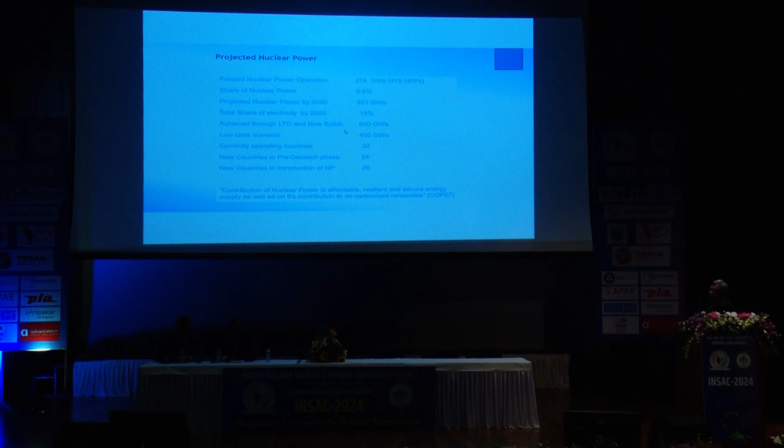In a low-case scenario it will be around 400 gigawatts. Presently we have around 32 countries operating nuclear power, and new countries in the pre-decision phase, around 24 more, and 26 more countries will be introducing nuclear power.

This was the statement at COP27, that nuclear power is affordable, resilient, and secure.

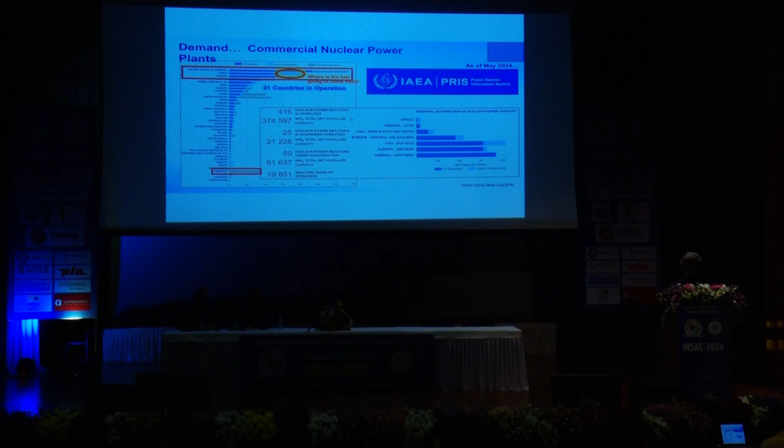This is the power reactor information system of IAEA, which is very dynamic on the operating reactors or shutdown reactors, and this is the statistics as of May. Anybody can access this daily, and you can see the major 3 countries, USA, China, and France, are building up a lot of reactors.

India also falls under building up new reactors, as you can see. But mostly the new construction is coming up in Asia, Far East, that is India and China, as you can see from this right graph.

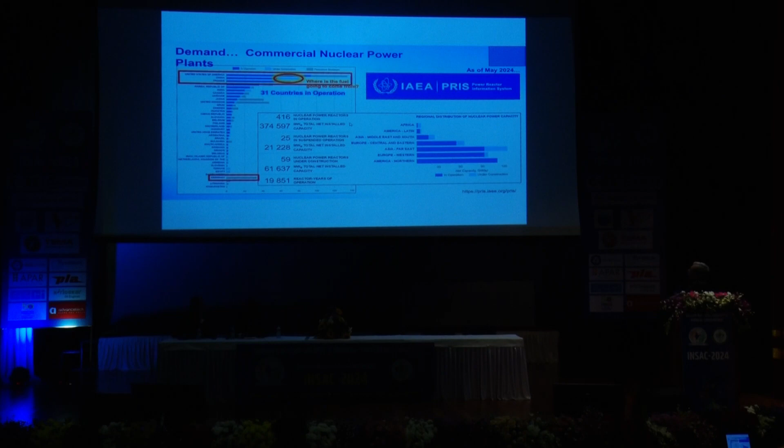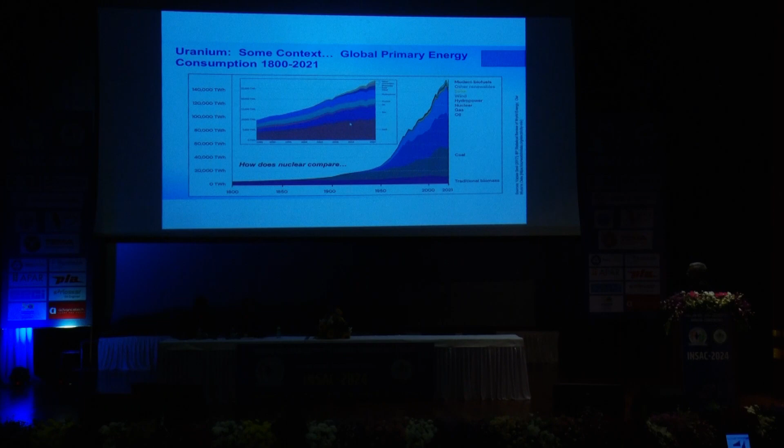This is another shot about the uranium spot price. There is a global supply that could reach around 145 million pounds by the end of this year.

As of today the annual demand is 180 million, and it's expected to double by 2040. So there will be a lot of supply gap in uranium by 2030.

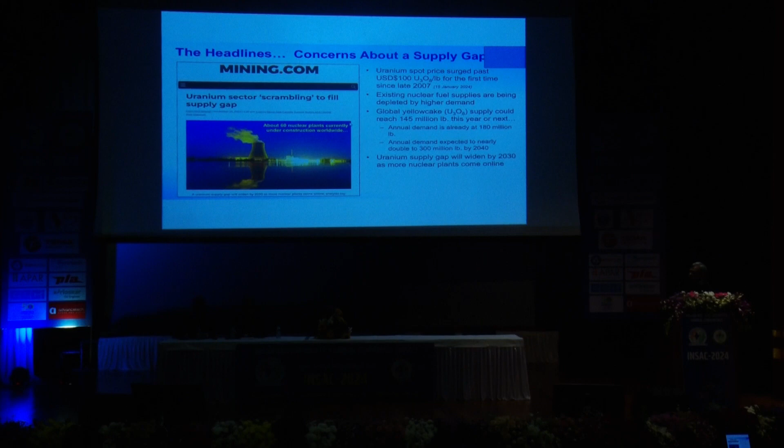This is another projection on the supply gap and demand. In the high demand scenario you may require around 90,000 tons of uranium, and as of today it is something around 35,000. So a lot of capacities have to be built up, and may have to be filled by secondary uranium supplies.

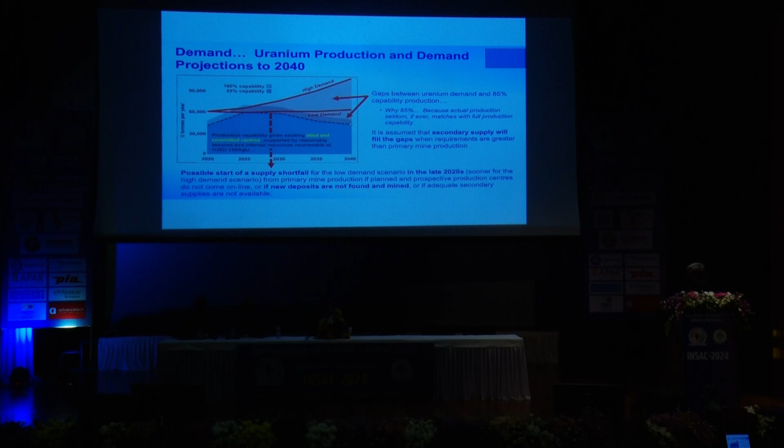A lot of thinking is going on about how to address this, that's why people are moving towards another source like thorium. So molten salt reactors may fill up some of these demands. If you take the scenario of SMR additions from 2030 onward, in the upper scenario of the study, you will have an additional demand of uranium of 26,000 tons.

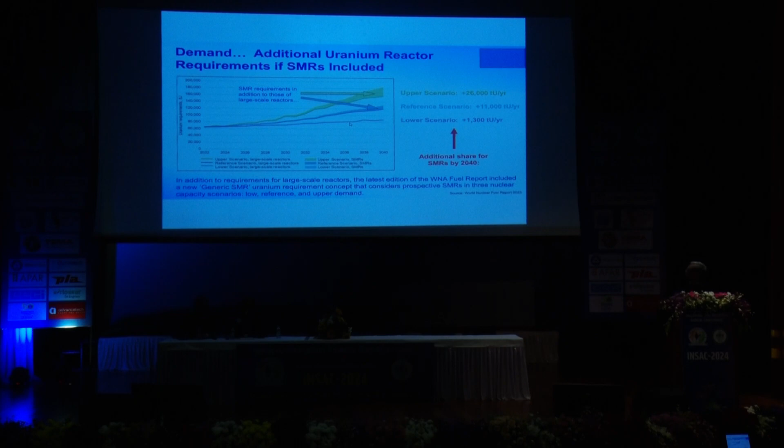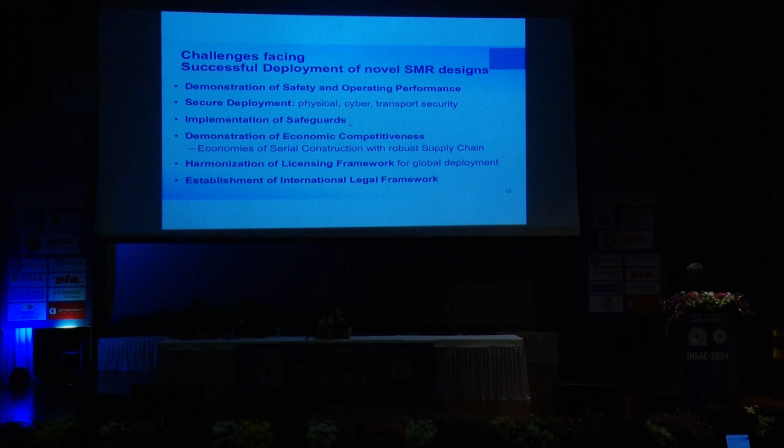That is where IAEA comes into picture, along with the economic competitiveness of these new reactors, harmonization of licensing framework for deploying them globally, and establishment of legal framework. A lot of work is going on in this last area, nuclear law related things, at international organizations.

Now coming to the fuel cycle. This center circle is a closed fuel cycle, right from mining to disposal. You can see the red flags are those which will need a lot of technical upgradation; a lot of challenges are there. The green flagged ones need to be adjusted a little bit, like in uranium resource or fuel fabrication, where little adjustment is required.

But in case of transport packages, we need to have a relook into the requirement of high burnup fuel and high enriched fuel, spent fuel. On reprocessing and disposal, a lot of things are to be closed. Still, a lot of work is to be done.

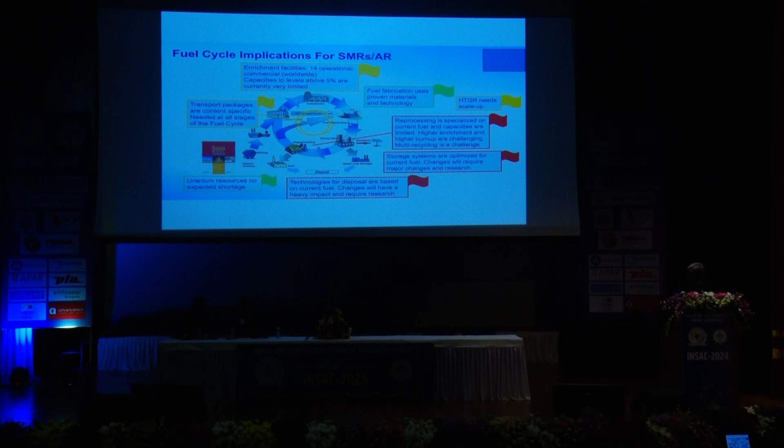So these are some of the SMRs being developed, like in Russia, these are already functional. There is thinking going on that these marine-based reactors can convert into land-based reactors. At IAEA also, a task force has been made to see the applicability of standards for these type of NPPs.

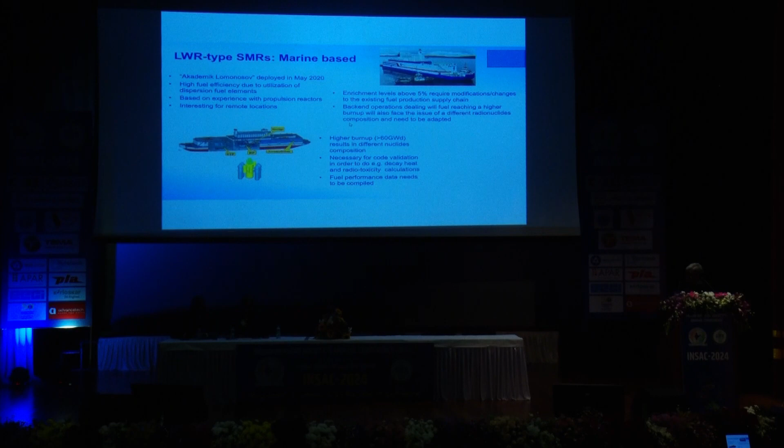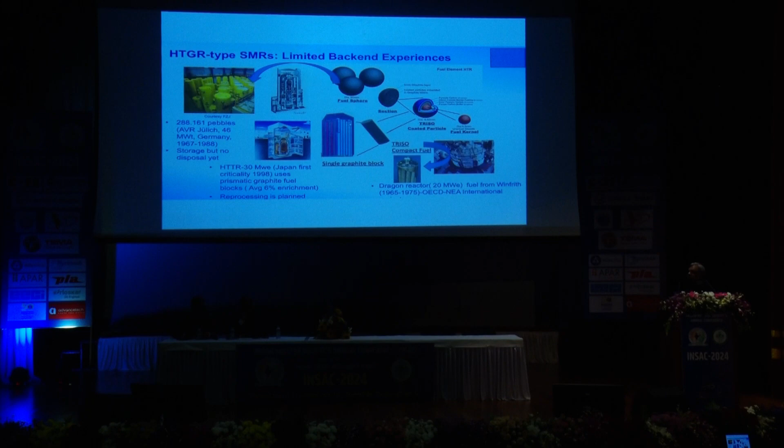Then high temperature gas reactors, like China's, will be the first one. But the earlier German reactor, the Jülich reactor, there is a lot of experience on its operation and the management of spent fuel. This is the fuel, called triso-coated particle fuel. The handling of this fuel is another issue, whether it is reprocessable and how to store this spent fuel. So, though it is advantageous in operation of NPPs at high temperatures.

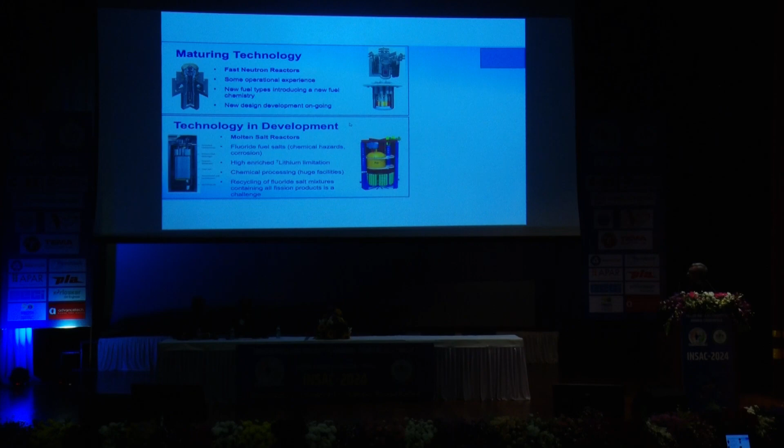So these are some of the maturing technologies which India already has maturity in, sodium cooled fast reactors. A lot of countries are developing this fast reactor without using plutonium, and the molten salt reactor is still in a very nascent stage. A lot of research is going on, and different salts are being tried, fluoride or chloride salts. The problem is about enrichment of lithium and then recycling of those salts. There is a tech doc published by IAEA last year on molten salt reactors, on the status and trends in molten salt reactor technology.

Then coming to fuel designs. There are 4 verticals in SMR. One is the light water type reactor, similar to what we have in PWRs. The second one is high temperature gas reactors. The third one is fast reactors, whether sodium cooled or lead bismuth cooled. The fourth category is the molten salt reactor, where the fuel may be thorium or enriched uranium mixed with the salt.

So here I would say that the molten salt is a long-term solution that is around beyond 2040. But yes, high temperature gas reactor, China has already commissioned one of that, and the experience from China will definitely be going a long way.

And on the fast reactors, advanced technologies are already in operation in Russia, India, and Russia is coming out with a 1200 megawatt sodium cooled fast reactor, and they are using 100% MOX fuel.

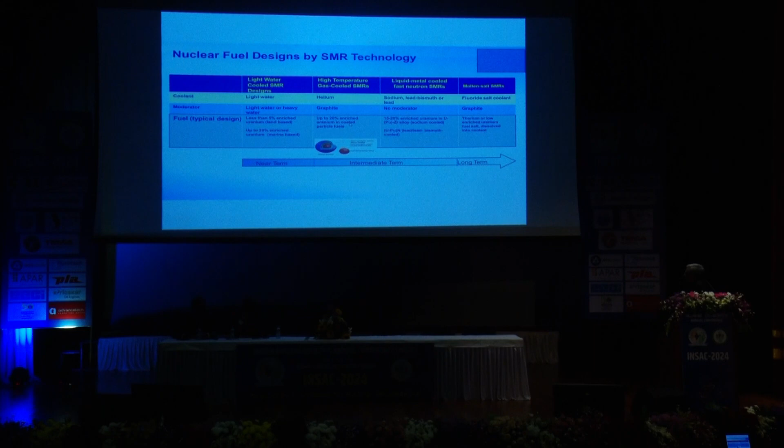So these are some of the challenges going to be faced, like for LWR, HALEU type of fuel, beyond 5% enrichment, fabrication and its packaging, transport. These are the challenges to be solved, and a lot of discussions are going on this HALEU, how to convert the present manufacturing facilities into HALEU type facilities, and how to organize the transportation of spent fuel with high burn-up and high enrichment.

And on high temperature gas reactor, a lot of validation of codes, irradiation tests, these things to be done, and advanced manufacturing techniques are being researched using additive manufacturing, and disposal is another challenge.

Then coming to fast reactor type of SMRs. So again, mass manufacturing of HALEU fuel or nitride type of fuel, and fuel performance at high burn-up, and pellet cladding interactions for metal fuel. All these are the issues to be resolved. And another is industrialization of this pyroprocessing.

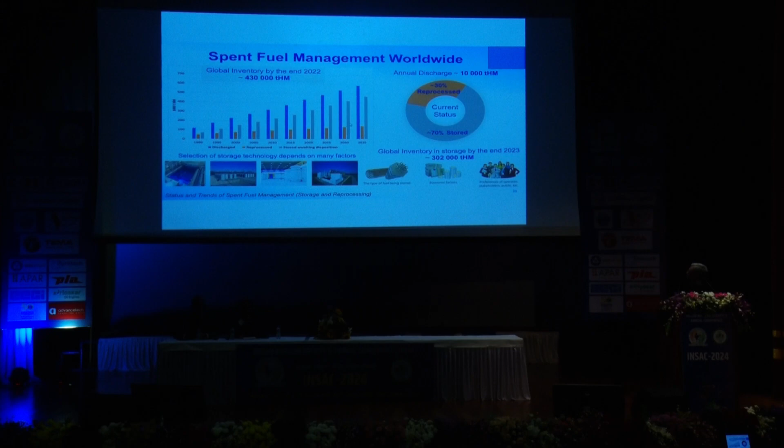And then Finland and Sweden, they may be the first to come out with the repository. Finland is likely to come out by next year for directly disposing the spent fuel. So a lot of research and a lot of discussions are going on this behavior of spent fuel in storage. And even IAEA is coming out with the safety requirement or safeguard requirement in long-term storage. So by the end of 2023, we will have a global inventory of 300,000 tons of heavy metal.

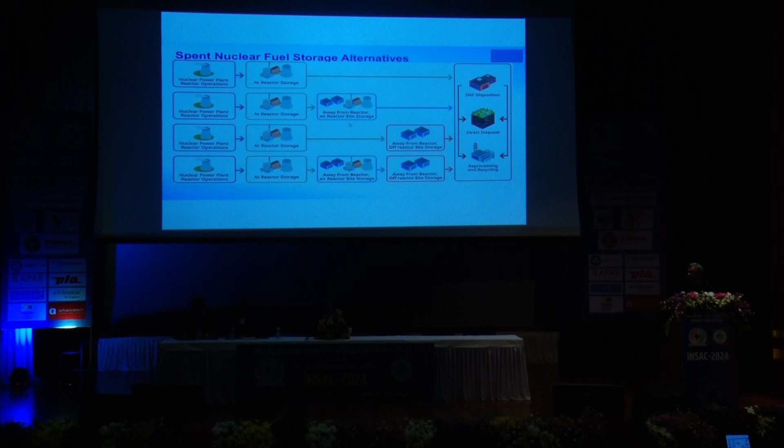And these are the different options for spent fuel management, maybe direct disposal or through reprocessing. So these are various options various countries can opt for. And these are different ways of storage, from pool to dry storage, from metal cask to concrete cask.

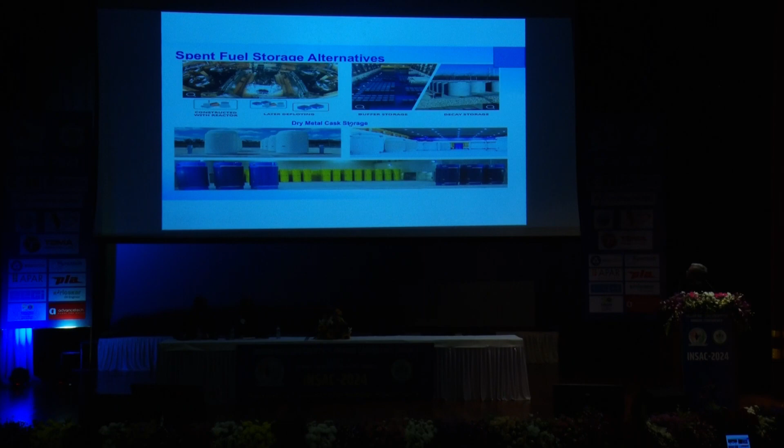And so now coming to next stage of advanced fuel cycles. Here again the major countries like France, Russia and all, those who are into reprocessing, there are a lot of discussions going on. I was fortunate to be part of that OECD NEA technical working group, and they are thinking of what India has already done about partitioning, transmutation and all that. So modifying their flow sheets to remove the radionuclides and to reduce the waste.

So these are different options, open fuel cycle or once through, or multi-recycling in fast reactor or through LWR route. And some of them are also thinking through ADS route. But a lot of research, like how much waste will be generated from each route, has been done, and this report is likely to be published by next year. I was part of that report. So they are doing a study on which of these routes will benefit in reduction of the minor actinides in the waste.

So, but these, the drivers will be uranium price. Suppose the uranium price goes very high, then this is the route to get back the uranium, and competitiveness of this fast reactor with LWRs. So these are the things; even now costing and economics are playing a big role at international organization, finding out the costing of these fuel cycles.

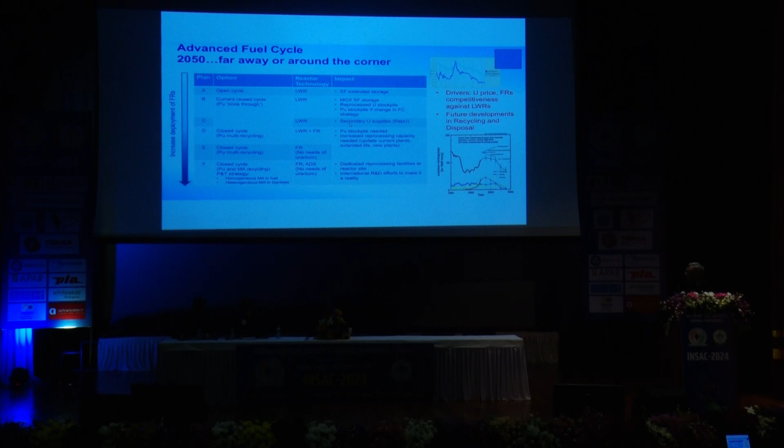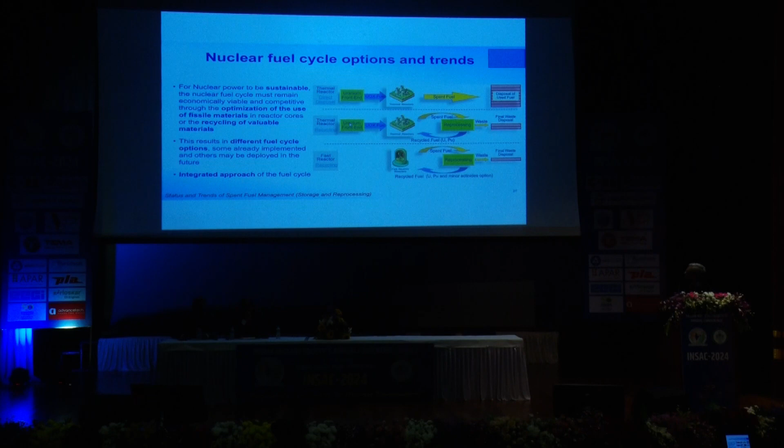So these are, in a pictorial form, the different options and the trends going on in the fuel cycle. And this is one of the reports which is under publishing. And you can see in the center the BARC's technology of cesium-137, ruthenium, and I was at the helm of affairs when we developed this ruthenium-106 in BARC. So this has been very much appreciated at international level, and Russia has been in an advanced stage of removal of these radionuclides.

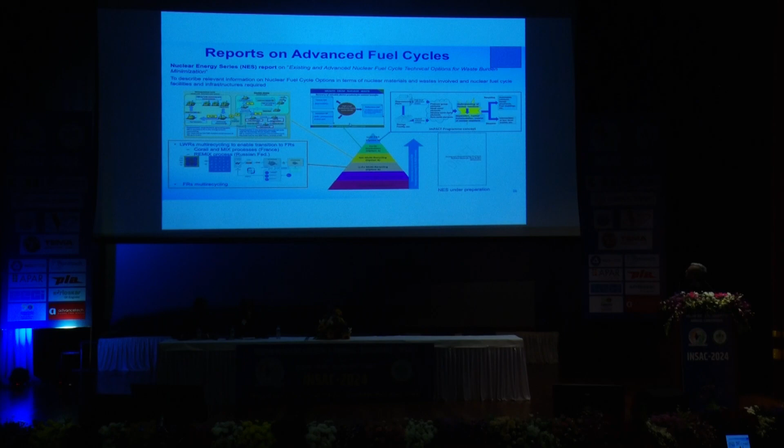So recycling is a mature technology, and there are many options worldwide, and there are more than 40 years of experience of reprocessing of LWR, like at La Hague in France, and now Japan is about to commission the Rokkasho plant, and China is building up a big reprocessing plant. Russia has already been running reprocessing for long. So now they are building up to reprocess the MOX fuel. Till now, they were thinking of mono recycling.

And by recycling, you can save 25 to 35% of uranium. This has been studied. And for some of the reactor designs, now they are building up for 100% MOX cores. As of today, they are using only up to 30% cores in LWRs. And in Japan and Russia, they're going; in Russia, BN-800 is a 100% MOX core. So you can see the recycling saves 25% resource of uranium.

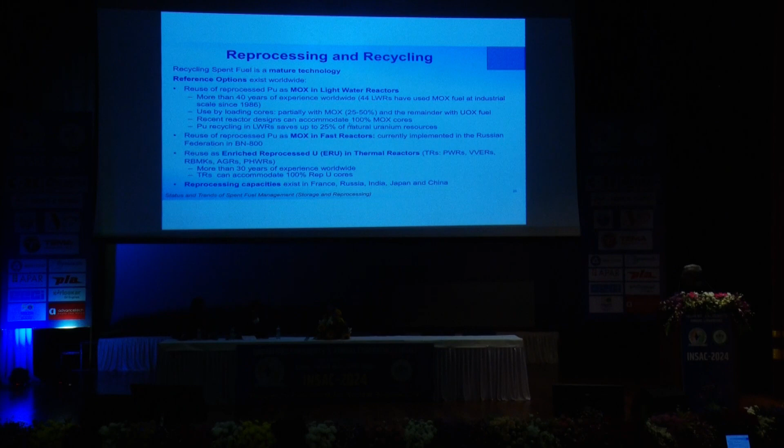And as you can see, in reprocessing there are only a few countries expert on reprocessing. So this is again the same thing. These are some of the publications on recycling.

And my last two slides on safety. So for the last 3-4 years, there has been a complete review of the applicability of those standards for the novel reactor. Novel reactor means SMRs or advanced reactors. And these are some of the standards we have been reviewing. The standard SSR-4 is for fuel cycle facilities. It's a safety requirement for fuel cycle facilities. And then safety guides on fuel fabrication, enrichment, reprocessing, storage.

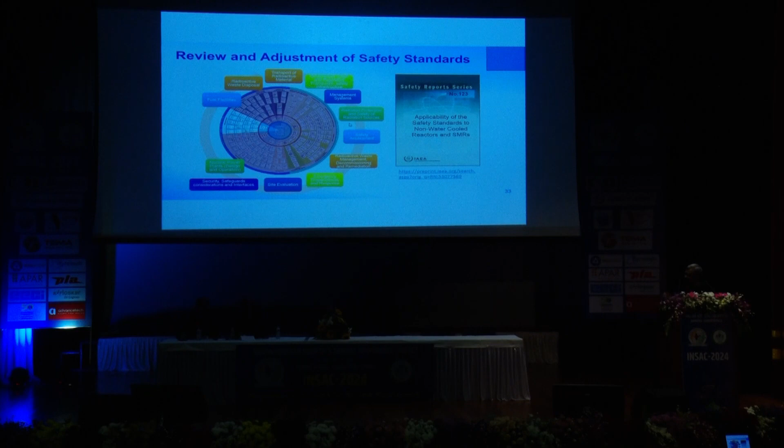Everything is being reviewed at the expert level now, and then it will go to member state level, and then it will go through 15 steps of review. Only after that will a report come out. Similarly, this SSR-6 on transportation. So these are being reviewed for their applicability to new reactors. And this is what we call a standard chart. These are all the different stages of the nuclear fuel cycle and the connected standards at IAEA. One preliminary report has already been published on non-water cooled SMRs. Similarly, many such reports are being published.

So in the end, my conclusion: for the LWR-based technology, the fuel cycle challenges are in both the front end and the back end of the fuel cycle because of the high burn-up and for their disposal. And for the SMRs to be deployed in the long term, the challenges are not different from bigger size reactors. Though there will be a smaller quantity of spent fuel generated, it could be an enabler for management of the back end.

And advanced fuel cycle and recycling is a must if nuclear has a future beyond 2050. And there are a lot of studies going on on how long uranium can sustain. So this is one of the answers: recycling, multi-recycling. And a lot of countries have embarked on advanced fuel manufacturing, like additive manufacturing, and related R&D for advanced fuel cycles. And a lot of collaboration takes place between many countries. And I've seen they are very frank in sharing information at the international level.